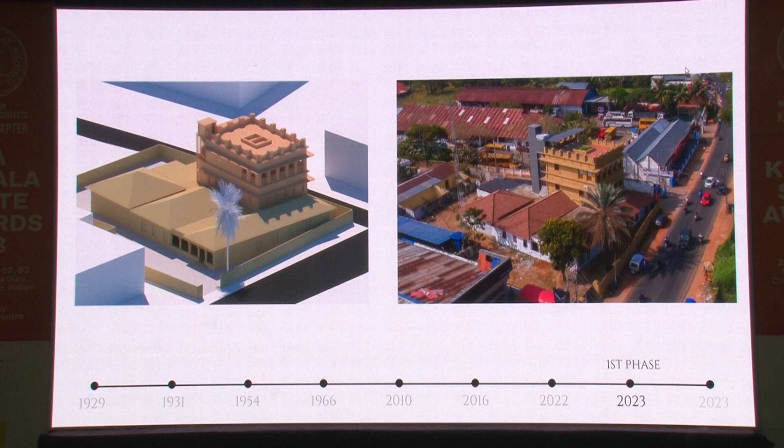With two adjacent roads, we created separate entrances, one from the main road for the commercial area and a new one from the side road for the residential section.

While seeking a suitable tenant for the commercial space, we focused on transforming the residential section. The first and second floors were converted into a versatile 3 BHK residence for the client, with future potential for conversion.

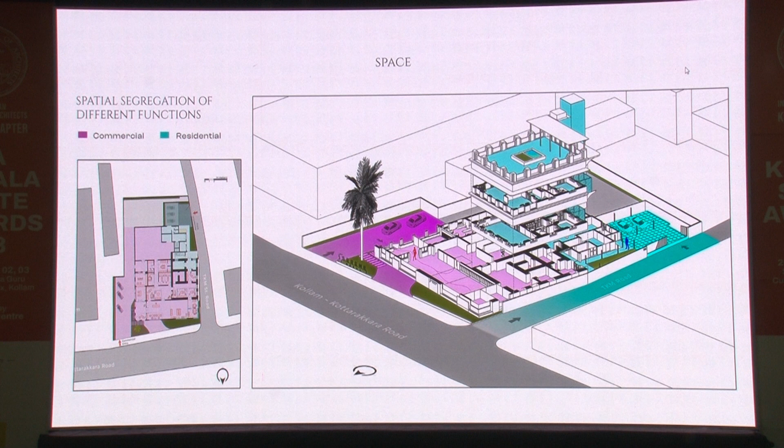Into a heritage boutique stay for family and guests. Upon completing the initial phase, a tenant, Serene Derma and Cosmetic Clinic, showed interest in the commercial space after being impressed by the project's progress.

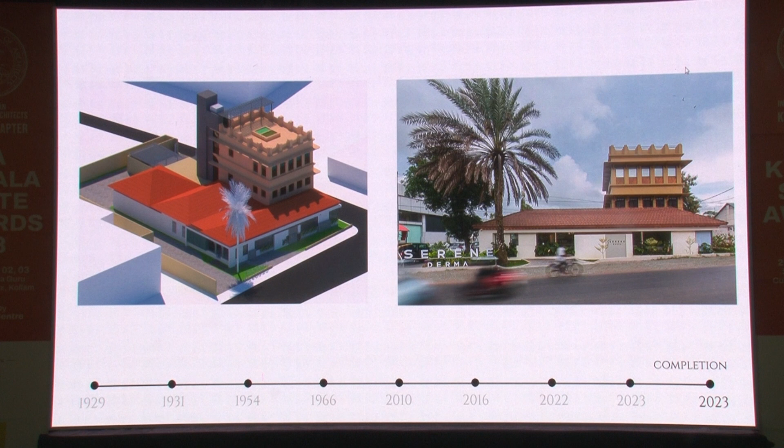This led to them entrusting us with their project. We now present both projects as a cohesive whole.

We have enhanced the ground floor by opening up the walls on the front side, allowing more light and views to come in. The lobby, reception, and administration room are located at the front.

Adjacent to the entrance, a new pharma store named the Derma Store is accessible from outside. A glass detail was added to transform the sit-out into the Derma Store.

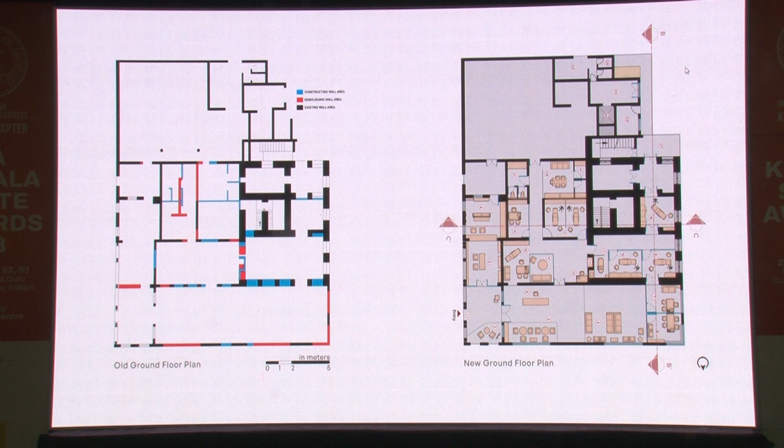On the rear side, a new entrance to the residential area was constructed. Additionally, a new car park for 3 cars, a new lift core, and a new sit-out were included.

Some layout adjustments were made indoors. The majority of the new elements are in glass to preserve the building's character with a touch of modernity.

The old toilet on the first floor was originally positioned on the southeast side near the back entrance. Due to its proximity to the new lift core and the rear staircase, the old toilet and shower space were transformed.

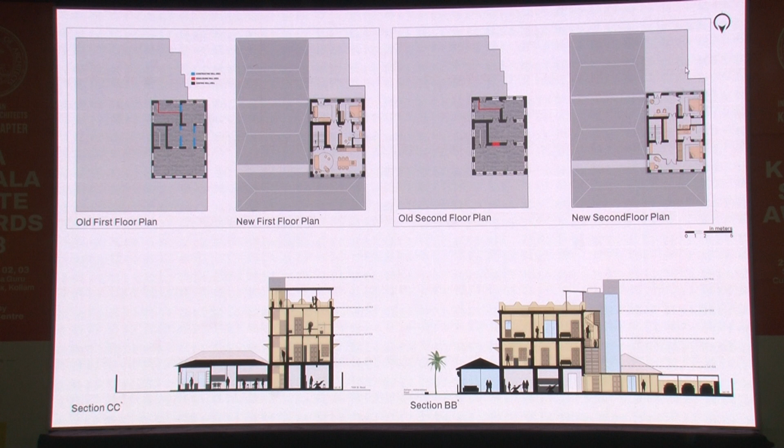Into a formal living area. To accommodate a new bedroom and toilet, some walls were added within the existing layout, which involved transforming it into a formal living area.

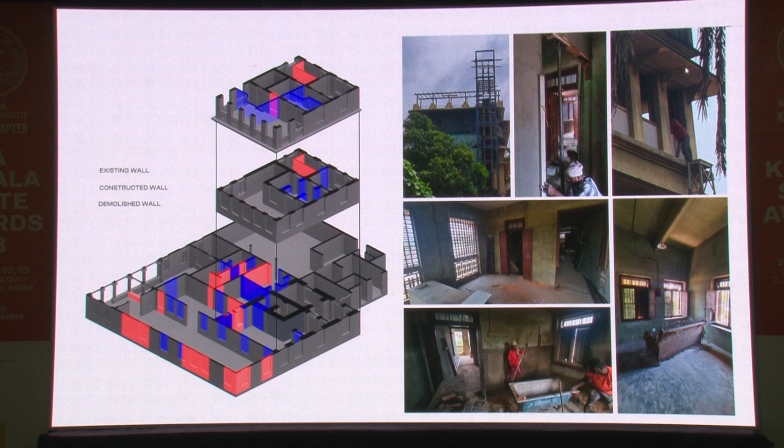The entrance to the toilet features a transition space for easy access from the common area. The primary area on the first floor is a spacious hall housing the family living room, dining area, and a small kitchen.

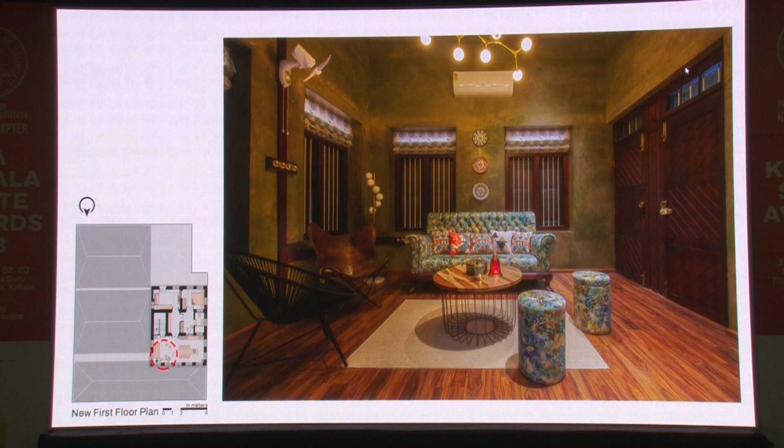We aim to introduce a new design language, slightly contemporary for the design details and dining spaces.

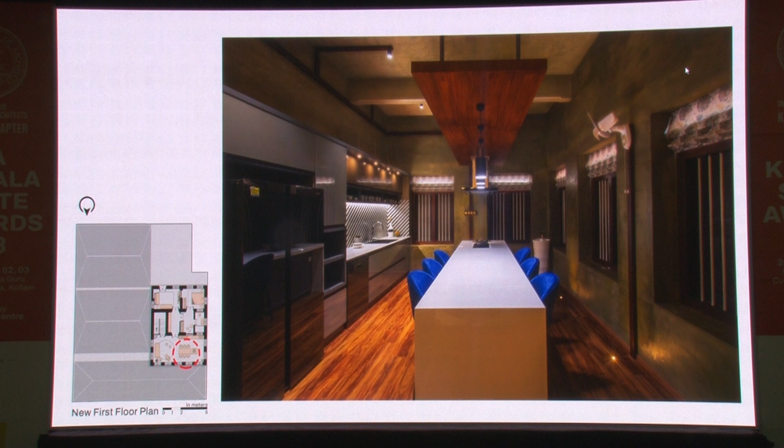The lacquered glass finishes and other modern elements incorporated into this project were inspired by a tribute to the visionary who always embraced the latest technology and design trends.

Efforts were made to minimize disruption or damage, leading to the creation of new electrical wiring conduits with casing and custom wooden boxes with old flip switches.

The sofa in the living room was a refurbished piece dating back 80 years. The old concrete floor was polished and waxed where feasible, while SPCs were utilized in areas where a new floor finish was necessary.

All the furniture was custom made to complement the project's timeframe and design aesthetic. On the second floor, we incorporate 2 bedrooms and a common room, which is now the kids' study space.

There was a large balcony that was as spacious as a first floor hall. This area has been transformed into the master bedroom with a curved wood and glass wall dividing it into sleeping area, study space, and a shared passage.

The original staircase inside the building core was kept to link the first and second floors internally. We utilized stains, polishes, and wax to enrich the appearance of the aged wall finish.